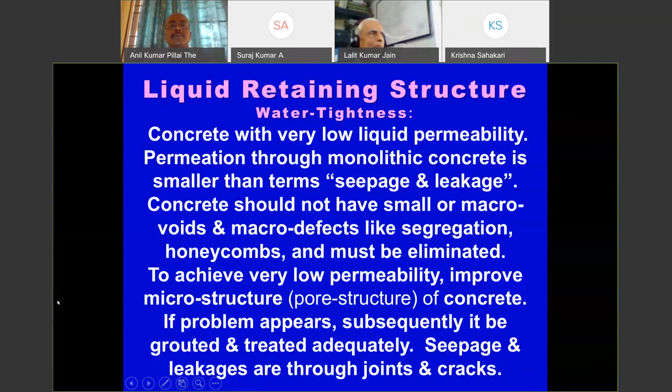Friends, yesterday we covered that IS 3370 is in 4 parts. Part 1 is general features, Part 2 is reinforced concrete design, Part 3 is pre-stress concrete design, and Part 4 is the design tables.

Out of that, we have revised all 4 parts in 2020. But we'll be able to speak only on Part 1 and Part 2. I spoke on Part 1 almost entirely yesterday. There are so many overlapping things in Part 1 and Part 2. Today we'll switch over to Part 2. I'll go to slide number 29.

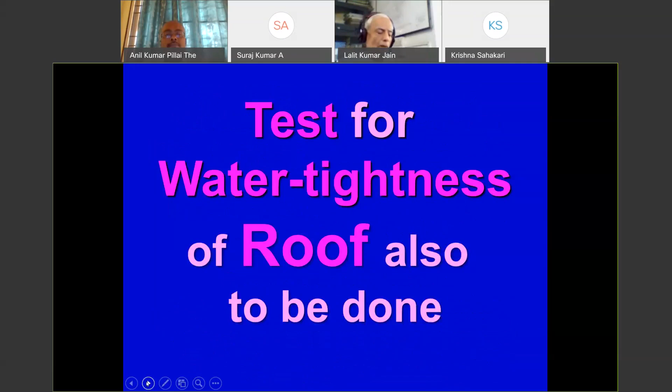Yes, today we'll be speaking about Part 2. I think the slide will do this now, you'll see the slide. Part 2 is about reinforced concrete design.

Since the 2009 revision, we have introduced limit state design in these water retaining structures. The working stress design is now out, it is deleted from the form. The standard doesn't deal with working stress design anymore.

The important area here is loads, where major changes have taken place. In the earlier part, liquid load was not defined. People used to take it either as dead load or live load, and there was a lot of confusion. Now, liquid load is defined. Liquid means water load, water or liquid. So this is now been defined, and we have to separately account for it in the load combination that is given.

Roughly, I'll tell you that in serviceability limit state, the liquid load in a tank we take up to the working top level, that is normally we call FSL, full supply level of the tank. It is customary in India to design these tanks for a level a little above FSL. Sometimes we call it the freeboard full condition.

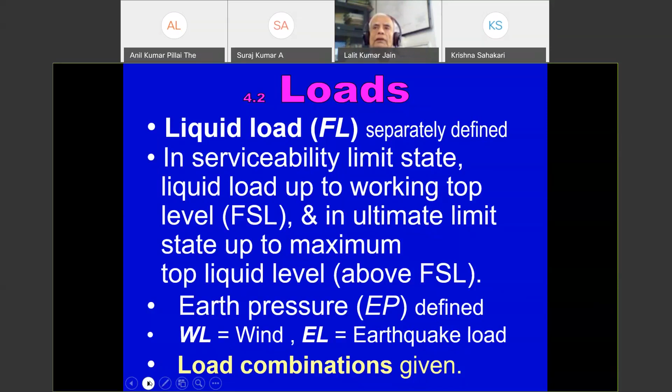And important is the load combination. As we have defined all these loads, the load combination table is given, and we take the combination separately for the defined loads. Now, one more change has occurred before I go to the load combination.

Mostly in Indian practice, the clear radius of the wall in case of circular tank was taken into calculation for calculating the hoop force in the wall. That is, pressure at a point into the clear radius of wall was taken as the hoop force.

Now, with this modification in the present code, instead of clear radius, we use the radius of the center line of the wall, that is, half the thickness of the wall is added.

Theoretically speaking, if we take the assumed pressure gradient across the thickness to be linear, then approximately the radius should be the center line radius. Approximately means leaving a small correction. If we do away with that small correction, approximately this will be all right.

But if the thickness is much higher, really speaking, it won't be the center line thickness, but a little less than that. Not half the thickness added, that is center line, but a little less. So, leaving that very small correction, what we have specified in the code is that hoop tension is defined for the radius of the wall, the center line radius of the wall.

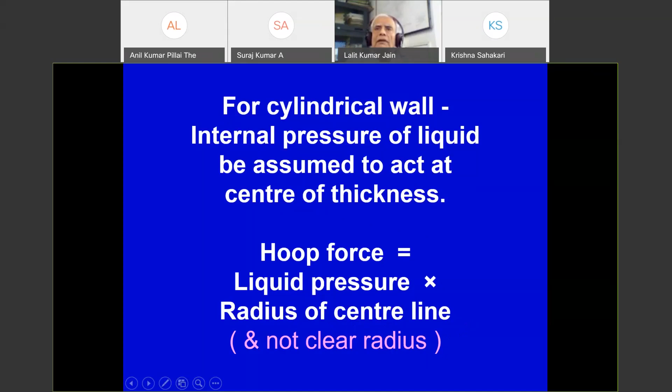Here you find that in serviceability limit state, earlier we had only one combination, where all loads with load factor 1 we used to take. In serviceability limit state, we are checking deflections and cracks.

In this revision, we have not introduced temperature shrinkage stresses. Normally it was assumed that temperature shrinkage can be worked out separately, but need not be combined with the dead load and water load or fluid load case.

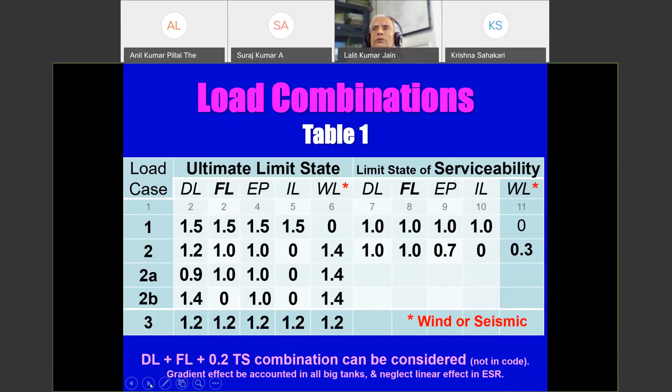Now, crack width is important, and as already in the existing code, that is the 2009 version, under the serviceability limit state we take the crack width limitation as 0.2 mm. But this code deals with it in more detail, covering when it can be less than 0.2 mm and so on. Due to early temperature shrinkage stresses and no other load combination, this is one in which we take 0.2 mm crack width. This is as it was in the code.

It has been said that though it is not part of the code, sometimes we may have to check temperature shrinkage along with other load combinations, especially for large or more important structures.

Concrete temperature shrinkage and wind and seismic loads are not superimposed together. Dead load and water load is not superimposed with wind or seismic.

This is there, it was there earlier. I was showing you in one combination, not the full design wind or seismic, but 30% of that load only is combined, not the full. But shrinkage temperature we are still not adding. It may come in a future revision of the code.

The temperature shrinkage is never combined with wind and seismic. In the limit state, we are not combining any temperature shrinkage combination, and in future also this will not be done.

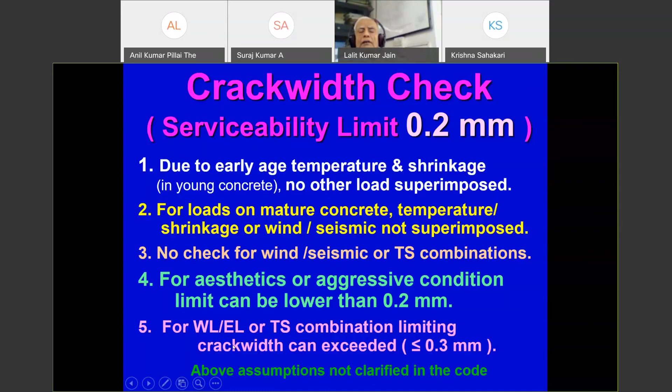Many designers know that the shear strength of concrete is affected when the member in bending is also subjected to direct force. IS 456 already gives the equation or correction wherein if the beam is under compression, the shear strength is improved with some factor.

Now, similar to that, when a beam or member is in tension, the shear strength of the member reduces. But there was no mention of this factor in IS 456 as well as in IS 3370. It so happens that many of our members in water tank design are in tension, so we are always dealing with direct tension, and that reduces the shear strength.

So an equation is given here to reduce it. This equation is introduced for the first time. The constant here is 8.

In the last many years, this constant was being debated. The values were cut off between 5 onwards. Today we have taken a value of 8. If you see the Australian code or New Zealand code, they have taken a value of 12. So maybe in future, because cracking is more important in water retaining structures, this constant will revise upward. But now it is introduced that the shear strength of concrete goes down when it is direct tension.

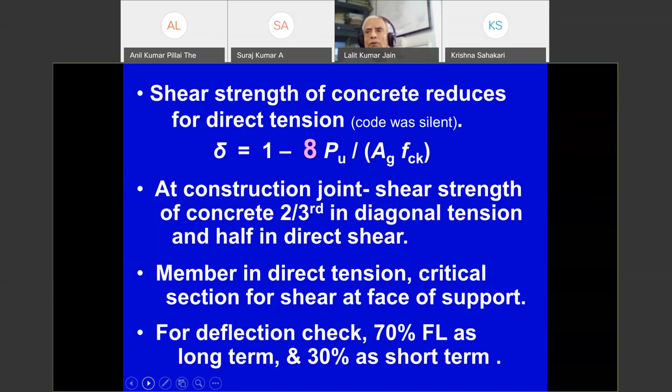We have to decide what class of water tightness we want to design. Till now, we have been designing structures generally where a small leakage, seepage, or wetness coming out is not objected to. We don't object to a small seepage, that is what concrete can do. We call it water tightness class 1.

It's very common. In this common class, the crack width limitation is 0.2. If at a particular cross section some concrete is in compression, when it is major bending and tension, you will find the neutral axis will be within the section and some compression block is available. So when the compression block is minimum 50 mm or more, in thick sections we will always find the compression block is more.

If it is a thin section, a small section, say 150 mm wall only, it may not satisfy. So in that case, if the compression block is less than 50 mm, there is another recommendation, meaning some reduction. But in this case, 0.2 is minimum.

But if there is no compression block at all, say when a cylindrical wall is in hoop tension, the crack is throughout and there is no compression block, then the crack width limitation should go down. So 0.15 mm is the crack width limitation. In the earlier version of the code, we were only looking at 0.2 mm as the limit, but now even for water tightness class 1, 0.15 mm will be the limit when the crack is through, or when there is no compression block in the section.

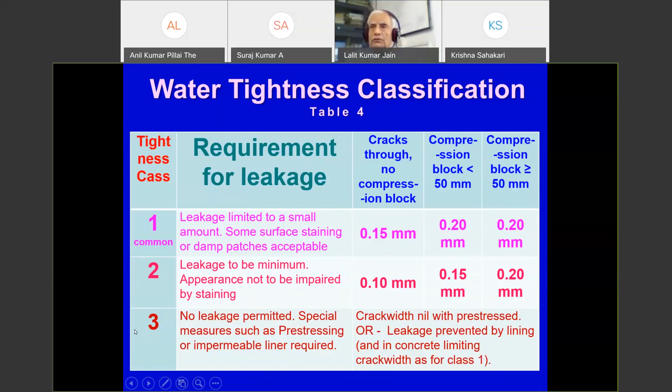Now friends, I had already told you yesterday that what we have introduced in this code is one more factor, which is the H/T ratio, that is the hydraulic gradient of the water to the concrete. So hydraulic gradient should be less than 20.

Now, in Indian conditions, most of the tanks we were designing with H/T ratio remaining of this order, H/T about 20, 25 of that order. If you increase this H/T ratio, internationally we can go up to 35.

So this code permits you up to 35, but at that level, the quality of concrete and workmanship has to be excellent. Average and good will not do. If we go to 30, we have to be very good in all other qualities. If we have 25, good quality. Average, 20. So if you are average, this can do, but your limitation of crack width we can relax. Instead of 0.15, I can make it 0.2.

Where somewhere we require 0.1 mm crack width, instead of that, I can do it 0.15, but never more than 0.2 mm. So for water tightness class, to have good water tightness in class 1 and 2, we can relax the crack width limitation, because if we make it more tight somewhere, we can relax it also. That relaxation is given here.

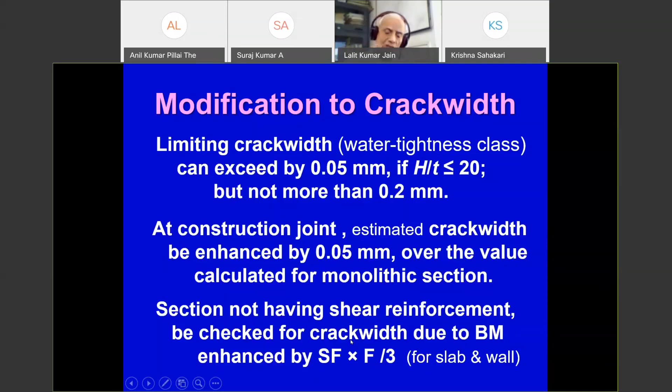Next, we'll look into what happens with temperature shrinkage. I've already indicated that temperature shrinkage stresses are there, and in important structures or large structures, or where temperature movements are high, or the shrinkage is very high. If you are using more of, suppose we are doing a tank with self-compacting concrete, we will not be able to design it with less than say 500 kg of cementitious material, 500-550 kg. So shrinkage is a little more, unless you add shrinkage compensating additives.

So if shrinkage is high or temperature is high, you have to account for temperature shrinkage also, but still in this particular revision we have not given much of the details. I hope Dr. Ingle will be talking to you tomorrow about the tank design. You may refer to temperature shrinkage also there.

So in small tanks, most of the cylindrical wall vertical reinforcement is common, and it doesn't make much difference. But for a rectangular tank, a large tank, say 4-5 meter panel, with sunshine on the external surface of the wall, this adds a little stress and makes a difference in crack width calculation, and maybe in provision of steel also.

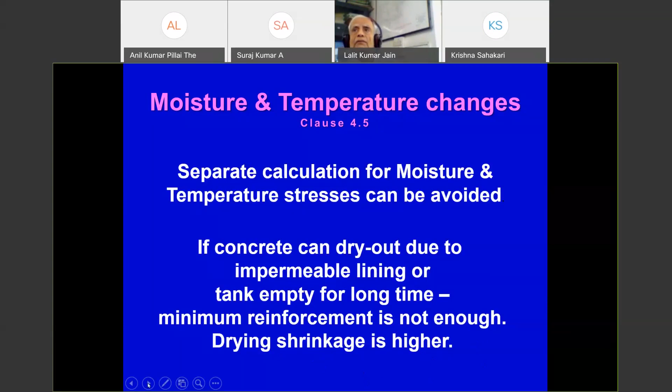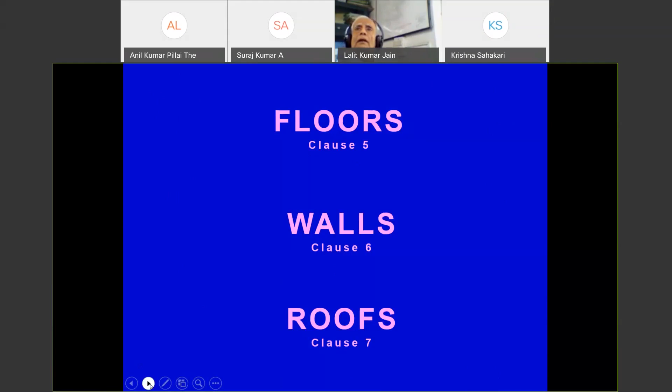This is the example of a tank I've shown you. In this particular code, as it was in the earlier code, we have retained clauses on floor, wall, roof, discussed separately. Those clauses are similar to what we have seen, and we have given some minimum reinforcement. I was referring yesterday that temperature shrinkage steel, or we call it minimum reinforcement.

We can look at this in 3 different ways. One is a simple minimum, where percentage of steel is specified in the code, that value is given in the code, you can adopt. Second is you can design like the rho critical - that is, when dealing with part 2, I showed you what rho critical is, a critical steel ratio. Depending upon the length of the tank or the distance between the movement joints, the steel can be higher than the critical steel calculated, or if it's a very small tank, it can be lower. So it varies with the size of the tank.

Now, ground tanks give a lot of restraint. The ground itself gives you restraint against shrinkage or against shortening of the concrete. Whereas an elevated tank gives little to no such restraint, except for the steel within, which is inside - the steel within gives you the restraint.

So if you try to calculate it for, say, HYSD steel 415 grade which is most common, you find that the percentage of steel can go up as the length goes up. Similarly, for ground tanks, it can go from 0.2% to 0.4%. But in our code, this table I have worked out is a bit modified from what is given in the code, because the code gives a simplified form, whereas somebody felt that we keep it higher even for elevated tanks.

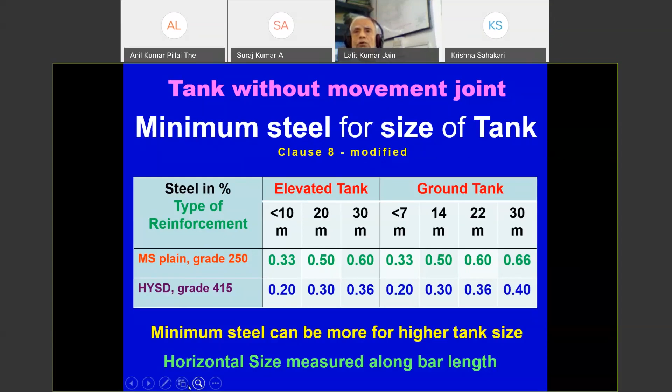Now, all these junction details have come from research done in Sweden at a building research station, built in 1973, after seeing that many retaining walls of bridges in highway structures collapsed or failed. So they had a whole research program and found out why it was failing.

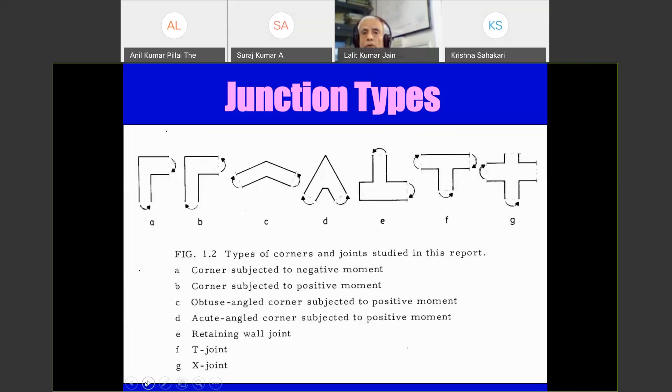So in such reversals, if there is any defect, it is usually seen, and the performance of the structure is very much affected. Hence we find that we have to be cautious, so something about detailing is added in this.

This negative moment junction, tension outside, is not very common in water tanks - we are not dealing with that here. No, sorry, this is the positive moment junction, the opening type of junction. This is important. The closing type of junction where tension was outside is not important, so I'm not dealing with that. Now tension inside is very common.

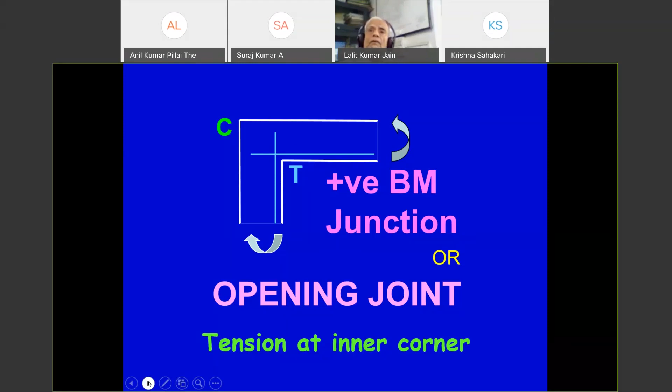Wall to wall junction - this is the major tension bar. How we anchor that bar is very important. Not only the anchorage length, but what happens to this junction and how the junction will behave is all important. We will deal with this in more detail. If it is a homogeneous section, meaning uncracked section, what will happen?

Stresses will be produced in tension and compression. On the tension side, see what is shown, these stresses are homogeneous. On the tension side, at the inside corner, the stress is maximum. On the compression side, at the outer fiber, stress is zero because this is the corner. And my resultant compression is more or less in the middle.

What happens is my effective depth is very much reduced. So what happens in this junction is...

The behavior is much different than what we have learned about the behavior of a flexural member which is straight. A straight flexural member behaves in a certain way which we have learned. What we have learned in our engineering and design practice is to deal with straight members like beam, column, slabs, and so on, or wall. But when these are curved members or junctions, that we have not gone through.

At this joint, if we take a diagonal - other diagonal, we have taken this diagonal, it is shown. If we take the other diagonal, a diagonal tension is produced. Tension will be along this direction, and tensile stress will come.

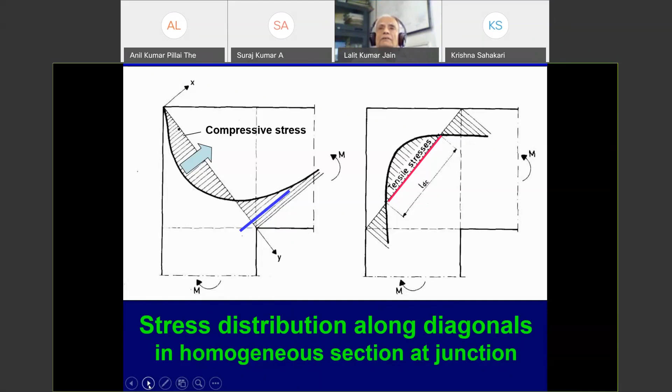There is a tension. The force here is known. Due to bending, we calculate tension. Tensile stress, tensile steel you are calculating, you know the tension force, you know the compression force. But this compression should be equal to direct force on the member.

Tension or compression, whatever it is. So we know this force, we know this also. So the resultant of this thing is a force in this direction, we know. Approximately we can calculate this distance also, and with a parabolic distribution, we know the stress.

Knowing the stress, if it fails here, progressively within some milliseconds the crack will produce, and the whole crack will form. You'll find that once a crack is produced of this length, this will immediately propagate. So if this portion is going out, imagine that this portion is going out cracked.

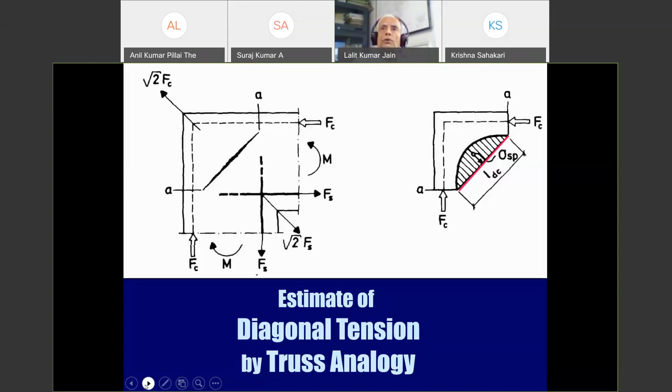Will the remaining portion be sufficient to qualify the joint? To prevent the crack from opening or taking place, it's not allowed to open. We should provide diagonal steel, like a stirrup, for diagonal tension. But it's very difficult to provide, and people had done research earlier on this type of joint, even before World War II, and it continued into the 70s.

No solution was found. This was known in the 50s also, 48, 45, 50. It was known that we should have diagonal steel, but they found that effectiveness is very low, and this is very much prone to placing errors of the steel, and this was not practical.

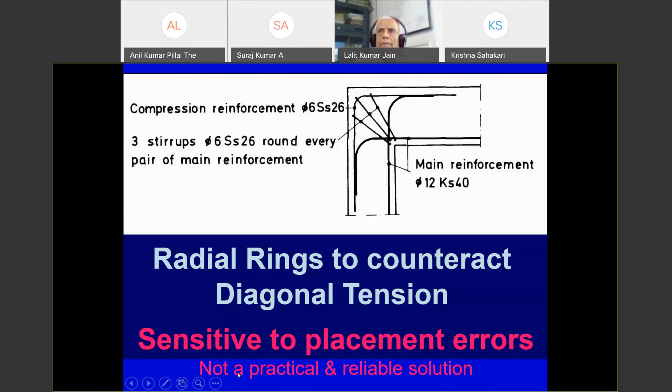One of the best things known before the 70s was that we provide a steel in a loop. We loop the steel and continue. That was the best type of detailing known at that time.

But in practice, if this loop doesn't go further, it has to more or less circumvent the whole of the junction portion except the cover. So if it goes through, we have an efficient junction. If somehow the loop becomes smaller, it's not an efficient junction. But in any case, even if it goes through, the efficiency is not more than 80%.

100% efficiency means this: you are designing a member for some moment. This joint you are designing, this member you are designing - we normally don't design the joint, we design members. The members we are designing, at this joint, are designed for some moment. Now, will this joint take that moment?

If we experimentally - maybe a full section, full size experiment - apply the moment for which the section is designed, will this combination of the two members and junction together take that moment? If it doesn't, we say that the efficiency of the joint is low.

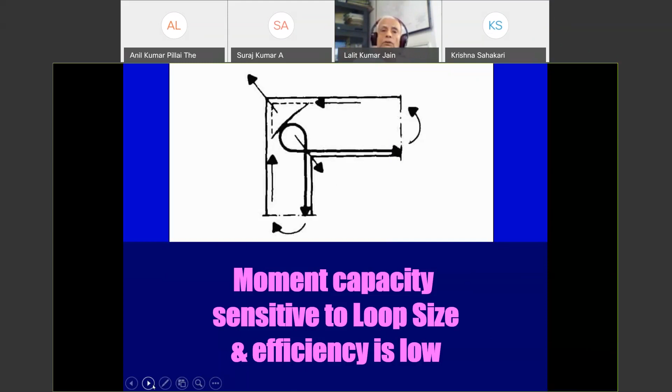We provide the bar with enough anchor length, something like equal to anchor length, and forget about it. But what happens to the joint? If the joint cannot perform, this will not perform. Efficiency can be as low as 45% to something like 25%. If the percentage of steel is low, the design section is underreinforced, the efficiency is 40%. If it is more or less totally reinforced, that means balanced section, the efficiency can go as low as 25-30%.

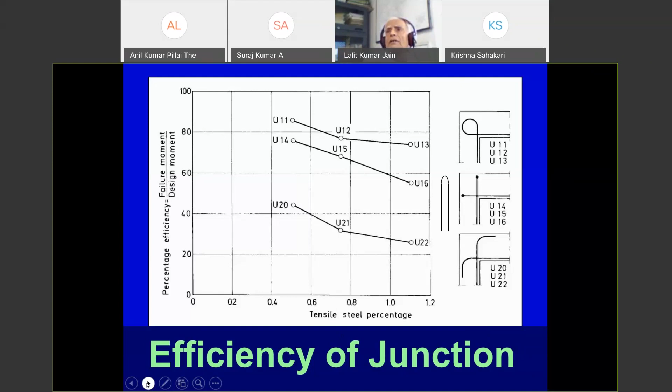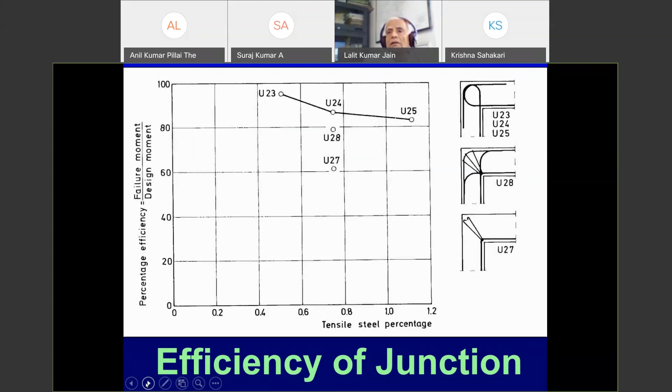That's how it is. Now they found that instead of doing all this, the efficiency doesn't go up. The best thing is to take the bar and bend it back at the hairpin to the same member. That gives the highest efficiency, but not even 100%. Looking at the crack width, they realized that to control crack width we have to have an additional bar. This was the test program: this bar is anchored here, this bar is anchored here, and on the other face, which is the compression side, we provide a nominal anchor bar, a much smaller bar.

What happens when we test this specimen in the laboratory? This is the reinforcement shown. You can understand, it's a very common thing done still by many people, and still in water tanks, reinforcement of one wall is just anchored into the other wall. And what is the efficiency of this joint?

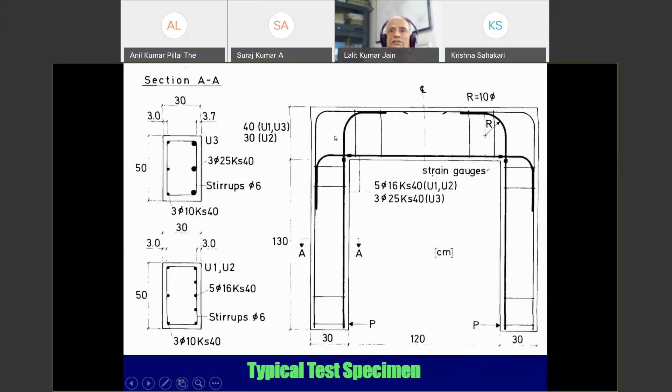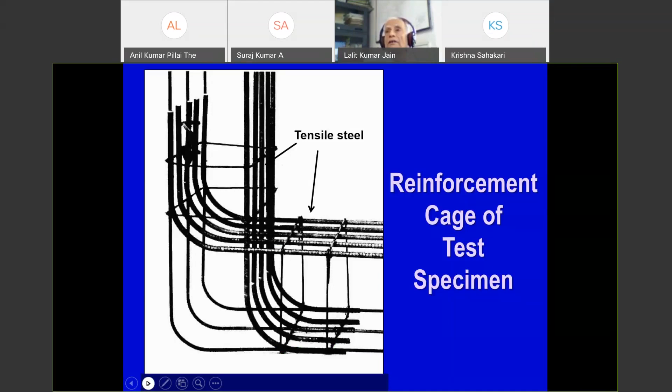When we apply load, the resistance to this moment applied here, and we find that a crack is formed. This corner is detached from the junction portion, and what remains, a heavy crack is also formed. So what remains, you can imagine there is no joint, it just becomes a hinge between these two lines. Our assumption that the joint is rigid is absolutely gone, not there. And this is not that in some cases it happens, in 100% of the cases this will happen.

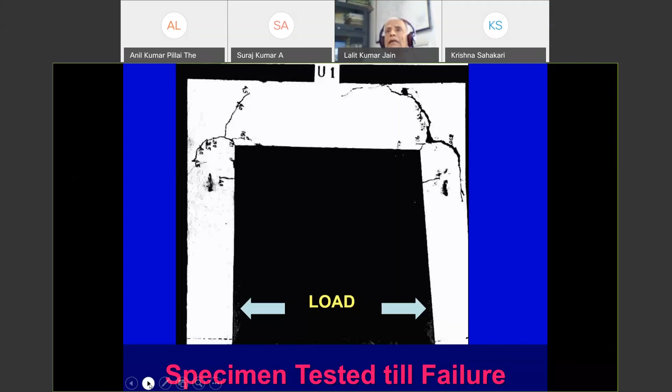So how the crack is formed, and if you remove this portion, you can see it like this, how the crack is formed, and the diagonal crack is formed. With simple mechanics you can calculate things, a simple triangle you can calculate. I'm not going into detail of calculation. You calculate what is the force required for this zone to be pulled off, you can calculate it. So it will be a crack like this, and this diagonal crack is very wide.

To control this crack, what we need is a fillet reinforcement. We cannot control this crack unless we provide a fillet reinforcement. And as soon as we provide fillet reinforcement, our efficiency goes above 100%. So we are crossing the limit of 100. That was very nice.

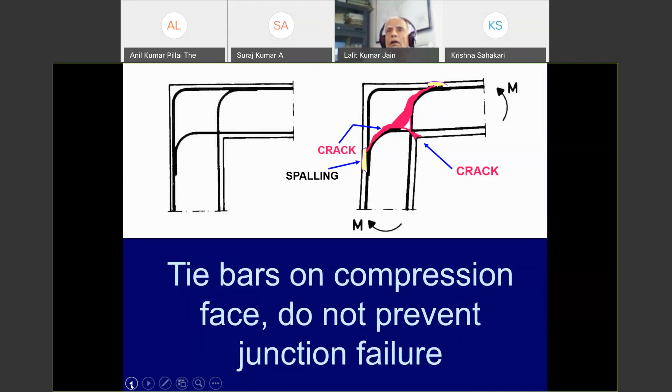I'm just repeating what I've said, that tension bars of one wall are bent like a hairpin and taken back into the same wall. This can be reinforcement. For the other wall, I'm taking the reinforcement like that.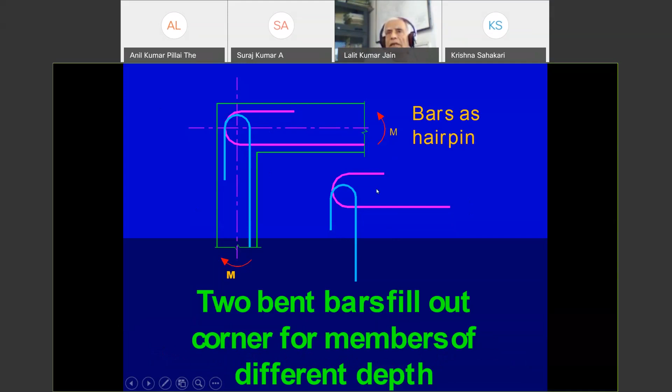This gives you the highest efficiency, and to make it 100%, we have to give a diagonal. The diagonal is a fillet bar. Whether we give a fillet or only a fillet bar depends. If you give a fillet, the efficiency is much higher, but a fillet bar is all you can provide. To understand this, I've given you 2-3 figures in different colors.

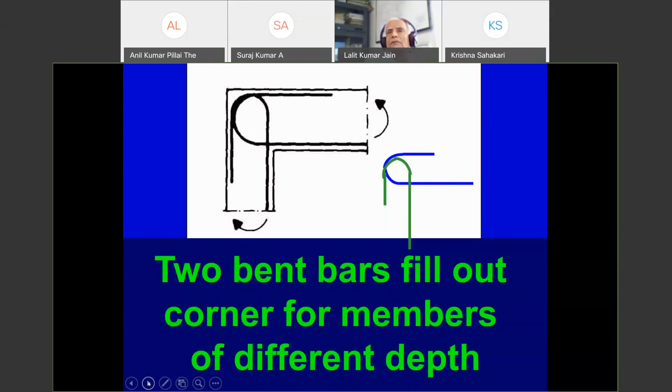So I'm repeating the slide just for people's clear understanding. To summarize, we started with a building like this. You can see it, where efficiency was 32% for some particular type of moment capacity.

Now, with various types of detailing, we improved it to something like 110, 114%. So we cross 87, we cross 100 by providing a fillet bar. When we provide a fillet, there's no question of percentage efficiency because it will go much higher.

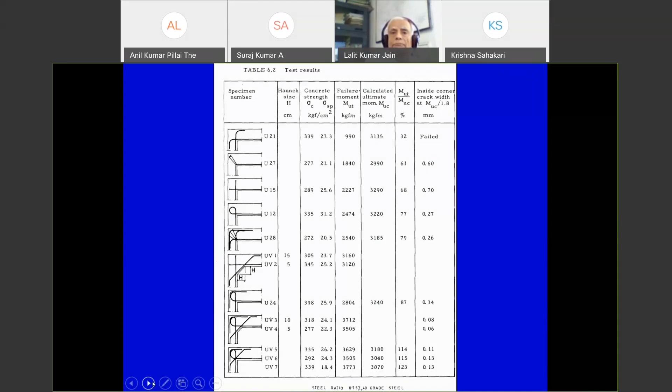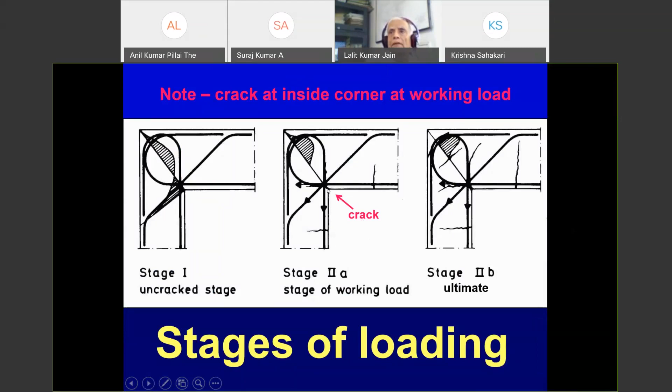So this fillet, what happens and how the control over cracking takes place, and so on - this is the final recommendation. This figure appeared first, though the research was done in 1973; this figure first appeared in DIN 1045.

Similar to IS 456, there is a German code. So in the early 80s, they had introduced this as part of their code, as part of their standard. It was introduced in the 80s.

And still, after 40 years, we are discussing this and we are not informed - most of us are not informed on this result. So this has been introduced in this code now.

Now this bar goes and comes back the same, so half the effect is there. If I have a small wall, say a 200 mm wall, it should come out by about 100 mm. This length here onward should be equal to a minimum, and how much it comes out is also important. If the bar is thick, you'll find the anchor length may be satisfied here but not there. You have to satisfy both.

And the diagonal bar should be 40% of the main bar. If these two main bars are different - we may have two bars of different thickness, with design bending moment kept same but for some reason we provide different steel in the two bars - then the average of the two, 40% of that, is the diagonal tension bar.

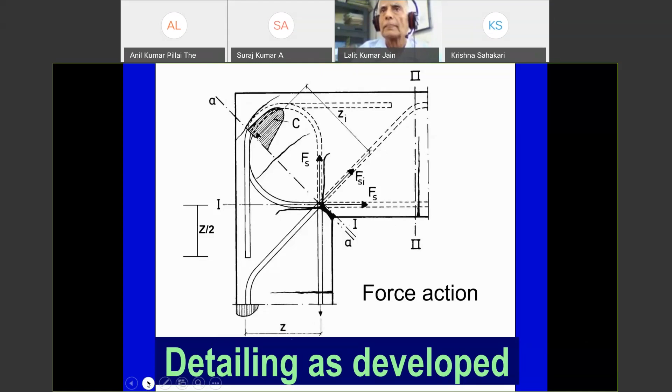Instead of 100, I am providing 140, meaning I have provided steel much more than needed. Then you can skip the diagonal bar, and that extra steel will take the stress as well as control the crack. So either you provide more tensile steel than calculated, or provide this diagonal bar, which is 40% of required steel. This same figure is shown here.

This type of detailing is not correct. You should understand - I'm repeating the slides so that one can understand the training required here to achieve efficiency of the joint and control the cracks also. Otherwise, at these corners of the wall, these leakages will continue.

The same thing happens at floor slab and wall joints. This may not be a wall, this can be a floor slab - a floor slab of a tank, and in an elevated tank it's a suspended floor, but it is not supported below. It's the floor slab and wall. Of course, more or less a similar situation occurs when we have a ground supported tank.

A ground supported tank, of course, will have a small toe, which increases the efficiency a bit more, but the basic concept remains the same - it can be a slab and wall joint. You'll find that the slab and wall joint at the bottom leaks heavily because we have not provided a structurally adequate joint. That is the basic consideration, and of course practical consideration also matters.

So wall to wall, or wall to slab, or slab to slab, whatever you call it, the situation is that two members are meeting at right angles, tension is inside, and the joint is very flimsy. Flimsy means you have to take care. You have to provide a detailed drawing in this regard, and we have to change the practice, otherwise there's always a problem. There are a lot of leakages from the joint.

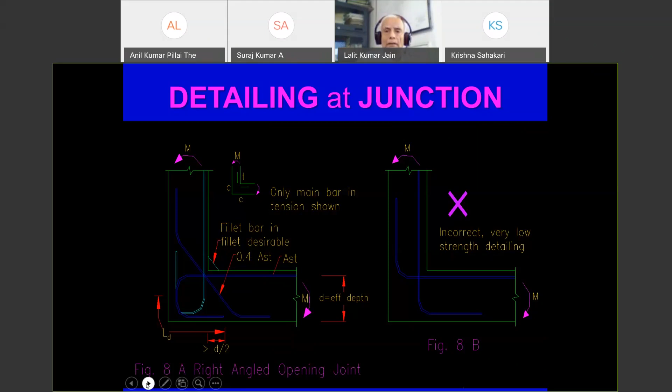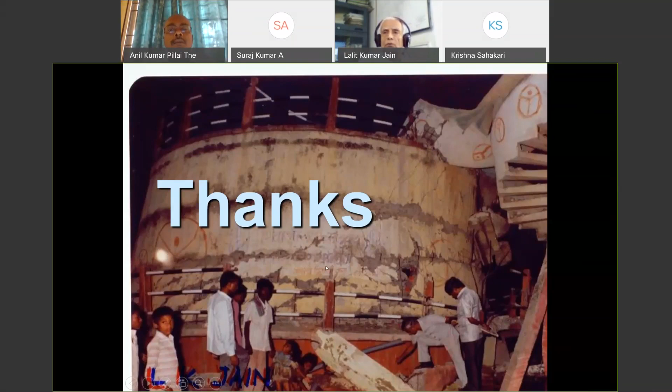Friends, this is almost the end of my presentation here on part 2. Of course, there are many other things which I have not dealt with, rapid calculation and so on, because they are the same as what it was in the 2009 code. If I detail everything, it's already in the document which I have given you, which you can download. If you are not downloading, you can download it later, all the details are already there. If you wish to continue, I can explain something more about practical calculation, all the values. Or the other option is, we have question and answer, you can ask some questions and we can spend some time.

Thank you, sir. Yeah. Sir, thank you so much for the presentation. Session 2 on IS 3370.

This photograph I have shown is of a tank collapse, from the Latur earthquake of 1993. The tank had collapsed. I had seen only one tank collapsing, and that was because of some problem in the detailing of the joint, the beam and column joint, the beam and brace, column and brace joint. So because of that, it collapsed.

Yes, over to you. Can we take some questions, sir?

Yes, very much. In fact, this is the second session on the National Seminar Series on Analysis and Design of Liquid Retaining Structures. Tomorrow, again, we will be having the third session. So before going on to tomorrow's session, let us take some of the questions which have been asked by the participants.